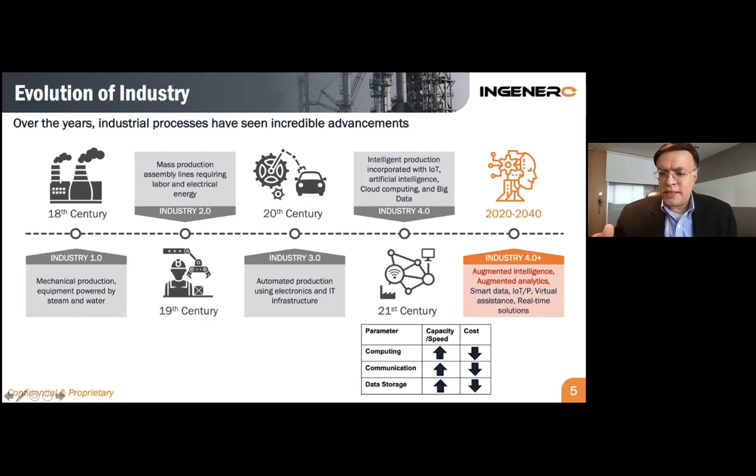And that's, again, based on our experience. So a couple of points that I will be taking up: the whole concept of augmented intelligence and augmented analytics, smart data, Internet of People, real-time solutions. That's really things that I will be covering as part of this whole presentation.

Let's start with augmented analytics. Now, analytics - we've had different kinds of analytics over the years, and what has really changed is now the ability for providing real-time solutions based on these analytics. Earlier, some of these solutions would take a lot longer - it took orders of days, months, and then it went down to hours, and now you almost have real-time solutions.

So augmented analytics - some of the key features are real-time solutions, utilization of artificial intelligence, machine learning, and domain expertise is certainly important, and I'll really get into that. The end result is getting augmented intelligence that can help improve operations or improve whatever activity is happening.

So now this type of analytics includes descriptive, diagnostic, predictive, prescriptive analytics that ultimately helps process manufacturers take well-informed decisions.

Let me talk a little bit about artificial intelligence. In the last few years, there has been a lot of hype about machine learning and deep learning models, and that has been equated to artificial intelligence. Yes, that is one of the subsets of artificial intelligence, if you will. But actually, people have been talking of artificial intelligence even way back in the 60s and 70s.

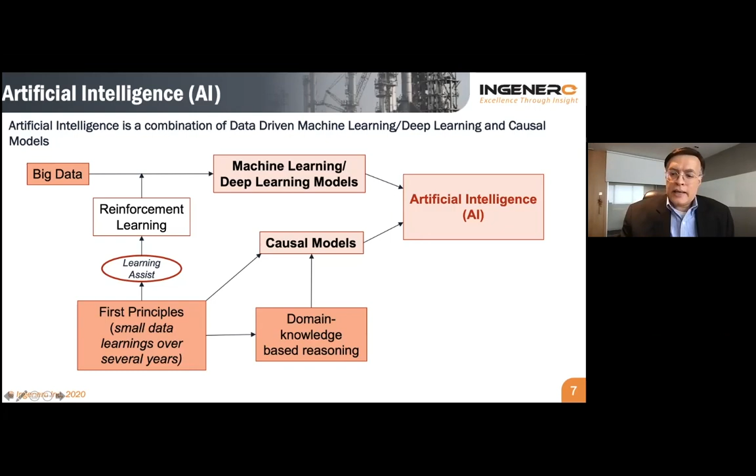So that combined with these causal models, from the first principles and domain knowledge, that combination is really what forms artificial intelligence. So it's a combination of the two. And it's important to use both of these, is what we've learned.

Next thing is augmented intelligence. I've been talking about that. So really, when we talk of artificial intelligence, it's not today where we're talking of replacing the human being. The human being continues to have tremendous value. There's been a lot of debates in the academic world about artificial intelligence completely replacing human intelligence, and they call it the point of singularity, but they say it's going to be 2050 or beyond.

So how do we use this? Today, where we can very effectively use this is using these techniques to handle large multidimensional analysis, time-consuming tasks, which would take the unaided human being forever, or may not even be possible. So some of these rote tasks can be very easily taken care of by these AI systems.

Now, once that is taken care of, it throws up a lot of insights and intelligence, which then the human being can start at a very different level, and use that for much higher productivity, much higher earnings, overall job growth, enhanced quality of the job. So that combination of human intelligence and artificial intelligence, providing the augmented intelligence to the human being, takes it to a very different level. That's the whole area of augmented intelligence, and that is really the application today of digitalization and so on, for us to take advantage of that.

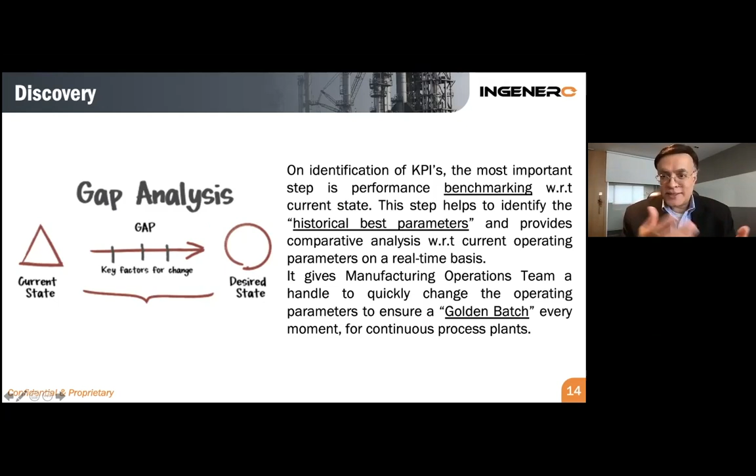And then defining your goals. You set your KPIs, set goals - this is how much I would expect to improve. Set realistic goals, and then you go into the delivery.

And delivery is where it's really combining the right tools and techniques. Having the expertise and domain experience is very, very important. And this is something we've learned through our past few years of working with digitalization - seeing some digitalization efforts at some places haven't really gone as successfully as intended.

Using fundamental principles is equally important, along with things like artificial intelligence and machine learning. This is again something we learn. Being able to very effectively hybridize and use them together is really where we start seeing very effective solutions coming out. The augmented intelligence that comes out of that allows for better decision making.

Again, like I said before, making sure that you change the work processes to be able to utilize this augmented intelligence. A different way of working. If you continue to work the way you have, you're just going to automate inefficiencies, and you don't want to do that. So you want to take advantage of these new digital solutions and take it to the next level.

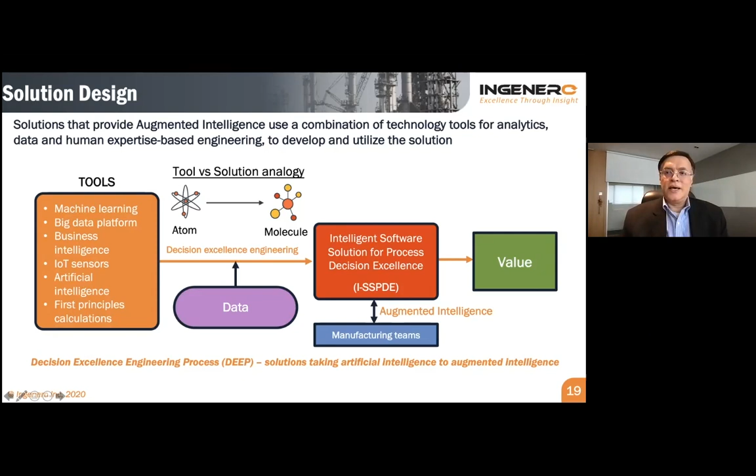And of course, once you have the solution, it provides the augmented intelligence to the manufacturing teams, and that's really where the value comes off.

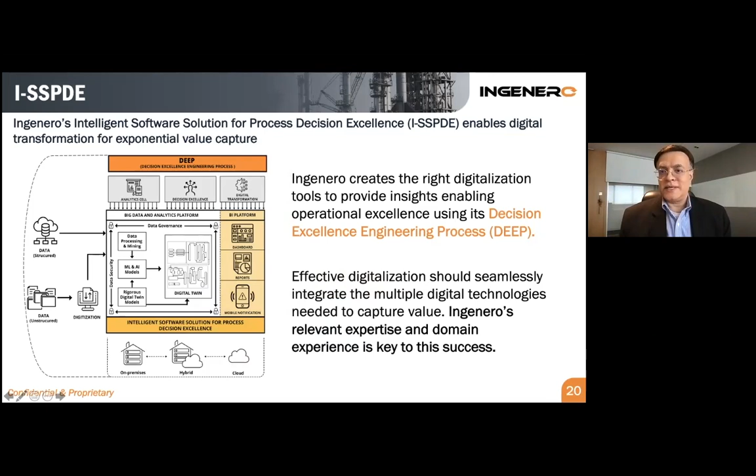Just a very quick glimpse at what we call I-SSPDE. Like I said, it's a seamless integration of various pieces of tools, ML, AI. You take the digitized data, utilize tools like ML and AI fundamentals, business intelligence where you get your dashboards. It could be deployed on the cloud or on premises, or it could be a hybrid. And then, of course, you have the decision engineering on top of it, making sure all this is pulled together and works along with the domain expertise and so on.

So some of the typical features of I-SSPDE: it provides actionable intelligence. They are hybrid models, data historian agnostic, smart dashboards, and it's an optimizer. Another very key thing is that it's false positive resistant.

This is where the combination of domain expertise with machine learning really is helpful, because pure data with a machine learning model, oftentimes you get a lot of false positive alerts and things like that, which you really don't want, because the system could then go into disuse very, very quickly.

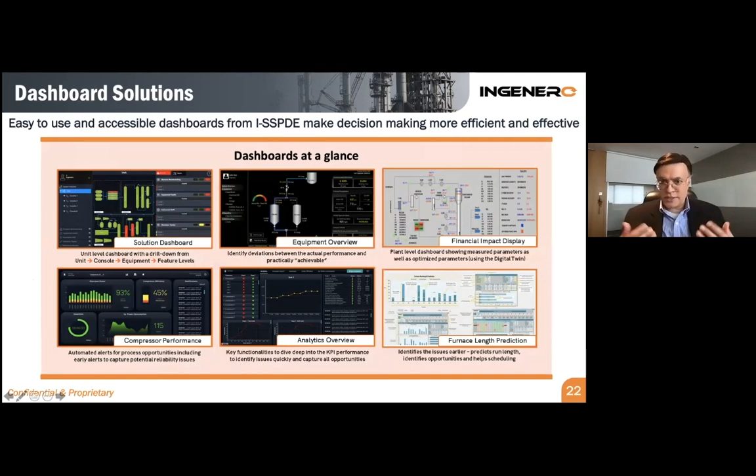Certainly, it's multidimensional, real time. There are soft sensors and so on. And so what it basically provides is accessible dashboards, making it more effective and efficient on the decision making. Various kinds of dashboards for different levels for the management, providing more financial information, equipment overviews, overview of the plant for plant management, engineer level overviews, and so on.

Quick case example. This is one of the organizations we worked with, and we started in about 2015 with them. This is one of the largest NGL pipeline networks in the US. We set up these advanced analytics and digital solutions for them across 40 sites. And then they took all this augmented intelligence and brought it to a central location, their headquarters.

They've got this single room where it's like a space station almost. You have large screens where you can pull up any facility or any combination of facilities and actually see the intelligence. And then you have the centralized team collaborating with each of these facilities, actually using this intelligence to augment the way they're operating.

And this we found had worked very effectively with this organization. They finally were selected as one of what they call the lighthouse facilities for digital solutions. They increased their profitability by 15% in the first year and reached almost 22% in the second year. So it was a very successful digital solution implementation.

And certainly there were a lot of learnings that came out of that. They did address a lot of their initial issues that they were starting out to solve, like some of the quality issues, underutilization of capacity in these assets, and so on. So that is an example of one of the places where we worked.

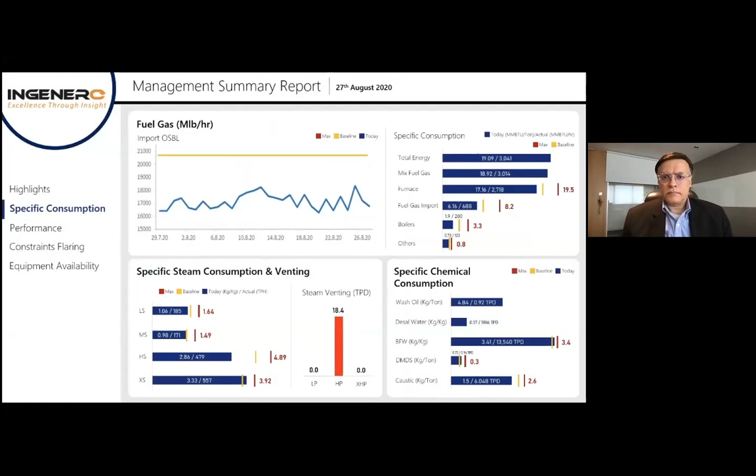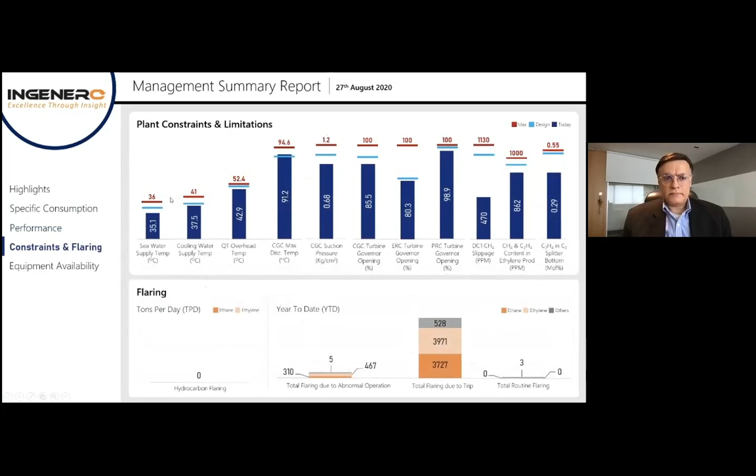In future, we could add more sections like inventory, accidents, deviations, and energy intensity according to the client requirements. Let's go to the next demo, which shows you some soft sensor applications.

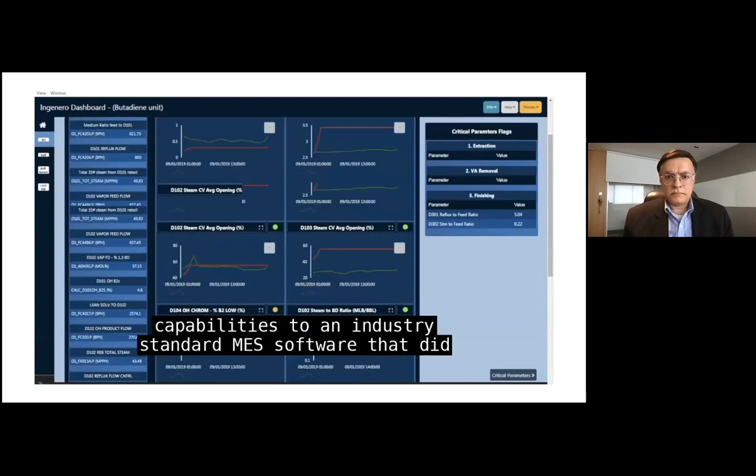Here is an example of how our product added AI/ML capabilities to an industry standard MES software that did not offer AI/ML capabilities in the MES suite.

Soft sensors were built using ML models to predict product quality in real time. Additionally, a forecast of up to 2 hours was also part of the prediction. This helped a customer take corrective actions ahead of time to avoid product off-spec issues and quality giveaway issues. Even a handful of such instances per year has the potential of saving millions of dollars.

Additionally, customized business intelligence dashboards delivered real-time updates for this customer. It is a one-stop place for a quick performance overview of the plant, identifying key areas which need attention, live recommendations for corrective actions, analyzing the high-level monetary impact as well as technical details at the operation level. It also offers different levels of views, which enable users to look into the level of detail per their requirement and time available.

And now this is another demo that shows an example of a real-time analytics solution that was done at an ethylene facility. Let's take a quick look.

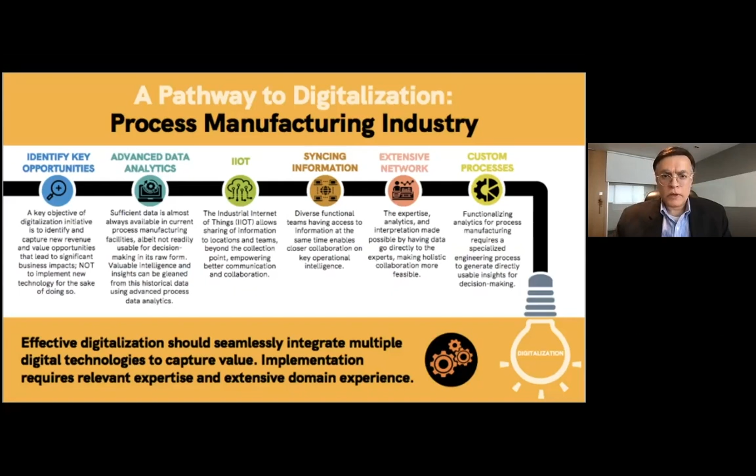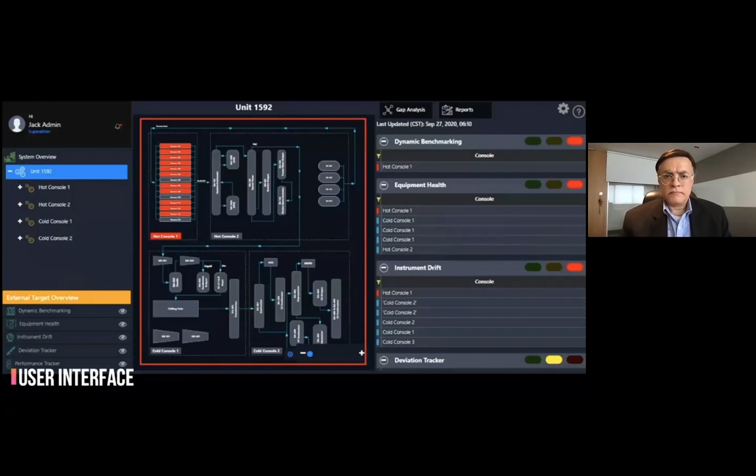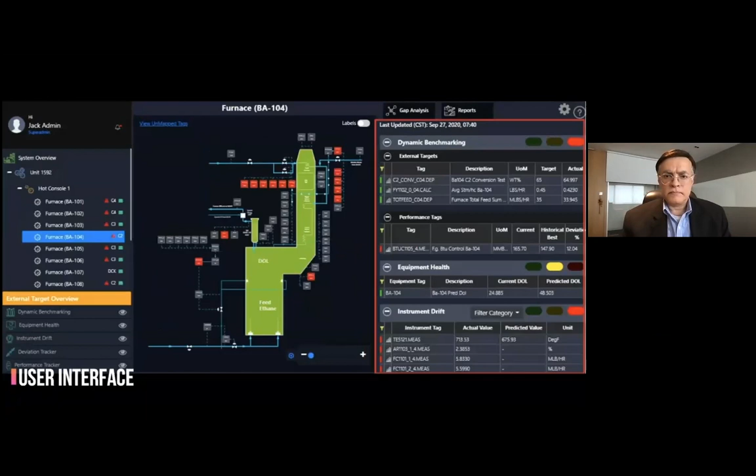Color of elements in the graphics will change based on the type of alert for that element. The right section provides the details of 5 features for the selected unit, console, or equipment. These 5 features are dynamic benchmarking, equipment health, instrument drift, deviation tracker, and plant performance tracker.

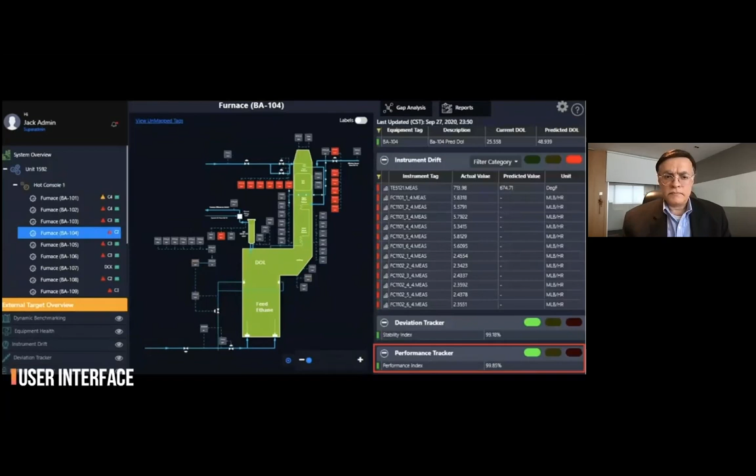Dynamic benchmarking: the objective of this feature is to identify historical best operation for a given equipment, while ensuring that the historical best from the last 3 years of operations closely matches the current operation of the equipment, but had better performance historically compared to its current operation.

Graphs help the user understand when the performance of a transmitter was in alert stage, shown with red indication, and when it recovered, shown with green indication.

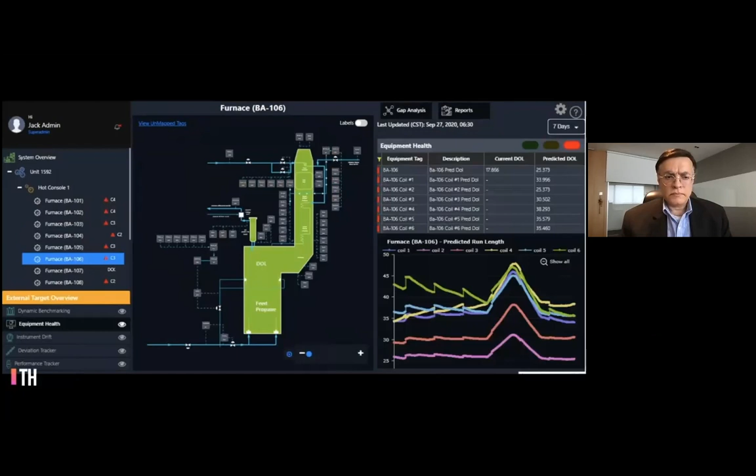Furnace run length prediction: the software helps understand the number of days a particular furnace can run, considering the threshold of the maximum allowable coil inlet pressure. The software is self-iterative, and coefficients for predictions are evaluated and refreshed every 10 minutes.

Here is a demonstration of value capture from live data for the dynamic benchmarking feature, which has the potential to save $0.7 million for one furnace run operation.

In the future, this can be developed for other individual units, which can be further extended to the entire complex level, to provide overall complex status and execute improvement potential through the software solution. Thank you for watching this video.

Let's roll on to the next one, which is an example of a reliability application.

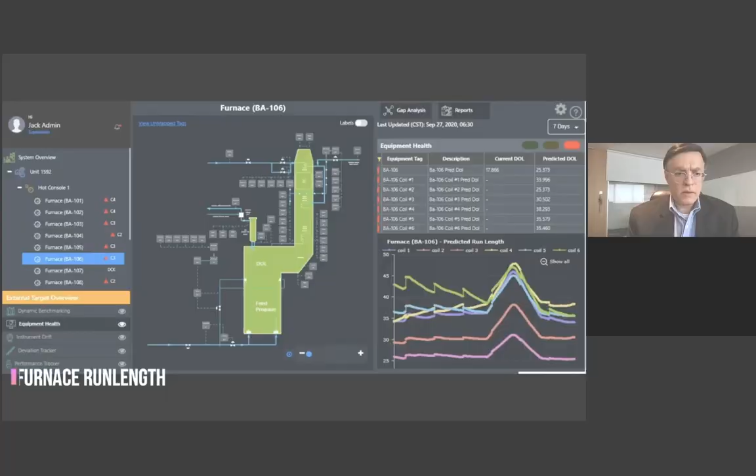Hello everyone, welcome to Ingenero's machine learning-based reliability tool that covers 16 critical equipment of an ethylene facility. The reliability algorithm can run in real time as well as for past dates chosen by the user.

Equipment that have performance issues are flagged in red, for example the quench tower in this case. Each equipment has detailed drill-down views.

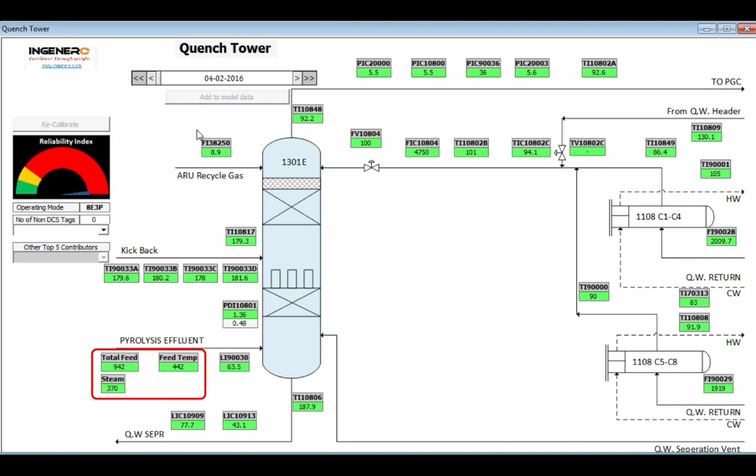For the chosen date, several critical correlated operating variables like quench tower feed, steam, and feed temperature are tested for abnormal operation. Critical variables are flagged in red, and other top contributors to abnormal operation are also flagged in real time. In this case, the total steam to the quench tower has been reduced.

Even though the absolute value of steam is normal, its relative value to the hydrocarbon flow is not normal. The relationship between propane feed to ethane feed and its ratio with steam is not normal operation.

The combination of low steam to hydrocarbon ratio and high propane to ethane ratio has led to severe fouling in the past historical data. The ML algorithm has accurately classified the current operation as a bad operation and has pointed out the root cause for the abnormality.

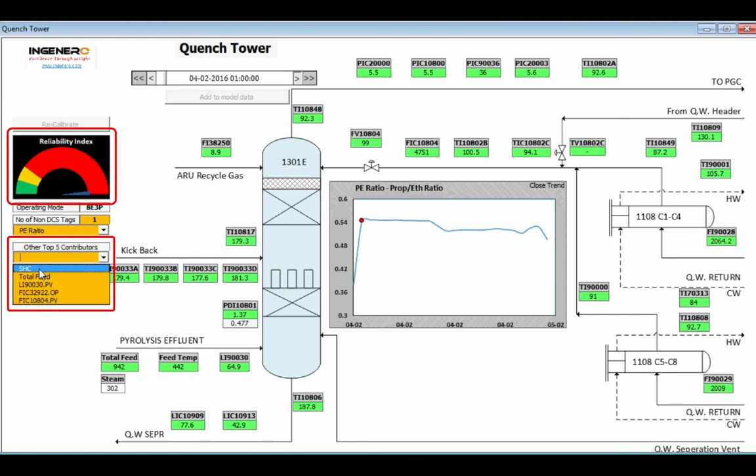Thank you for watching this video.

We go to one final one, and this is actually a refinery example, and then we'll wrap up from there.

Hello everyone, welcome to Ingenero Data Modeling Solution Tutorials, or in short IDMS tutorials. This is an introductory video to briefly explain the furnace module, which covers the clean TMT and run length feature. TMT stands for tube metal temperature, or skin temperature. So let's get started.

Once you are signed into IDMS system, you will see the IDMS system view. In this view, you can see different page options menu on the left-hand side pane.

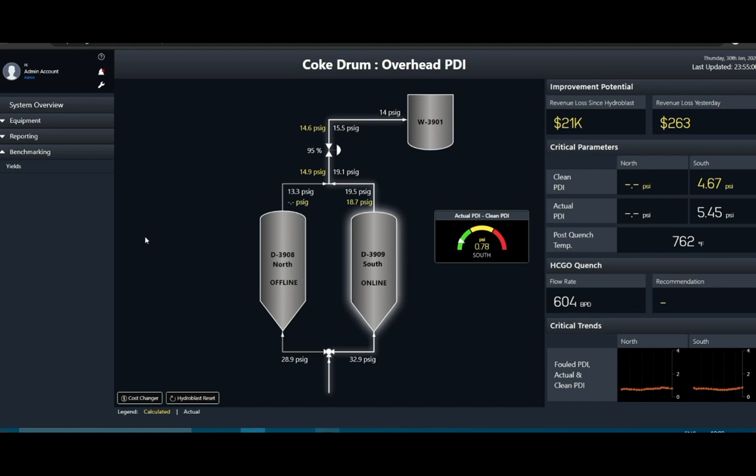In Billings Coker unit, there are two furnaces. Furnace A has pass 3 and pass 4, and Furnace B has pass 1 and pass 2. To access the furnace module page, follow the Equipment section, then go to Furnace and click on the respective furnace page.

Both furnaces have a similar user interface. Once clicked, the Furnace module user interface will appear. It is classified into two major areas: the central graphics and the right pane. The central graphics area contains a graphical representation of the coker furnace. The furnace graphic image contains colored circles corresponding to skin temperature indicators for each pass.

A Labels button is provided in the top right-hand side of the central graphics, used to toggle between two furnace screen views: Lean View and Detailed View. When the Labels button is off, Lean View appears. The circles are clickable, and on click it will show the details of the associated tag ID and values.

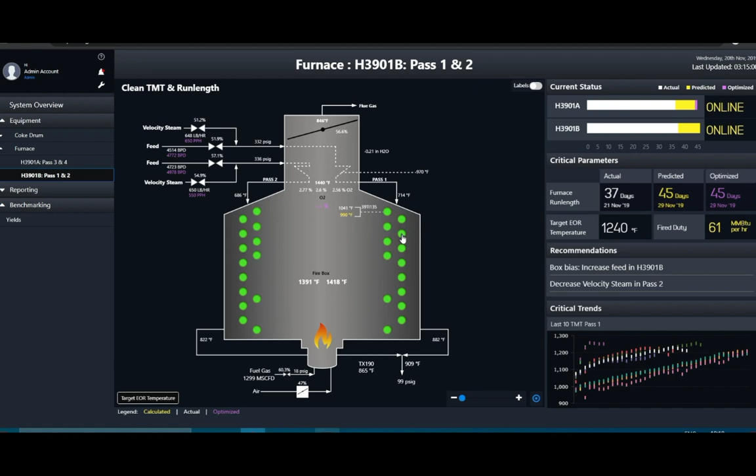When the Labels button is on, Detailed View appears. Circles are not clickable; tag ID and associated values will appear directly on the screen. The furnace module is divided into two categories: clean skin temperature and run length.

Let's first discuss the clean skin temperature module. This module has been developed to predict clean skin temperature of all passes in real time. For any circle, yellow color numbers represent predicted skin temperatures, and white color numbers represent actual skin temperatures for that tube location. Circle colors are assigned based on the extent of fouling.

Green, yellow, and red colors represent less, moderate, and high fouling respectively. A pop-up graph will appear after clicking on any tube skin temperature tag ID or value, in which actual and clean skin temperatures are compared. On this graph, the x-axis and y-axis represent time and temperature respectively.

Y-axis can be auto-scaled using the y-axis auto-scale option, provided on the bottom left-hand side of the graph. A Smoothened toggle button is provided on the top right-hand side of the plot to see 5 minutes data trend instead of daily average data. Trend duration can be changed from the available drop-down on the right upper corner of the trend.

Let us discuss the furnace run length module. It is developed to predict furnace run length and suggest changes in process variables to achieve optimized run length. The bar graph on top right-hand corner of the right pane gives comparison of actual, predicted, and optimized run length for both furnaces along with furnace current status.

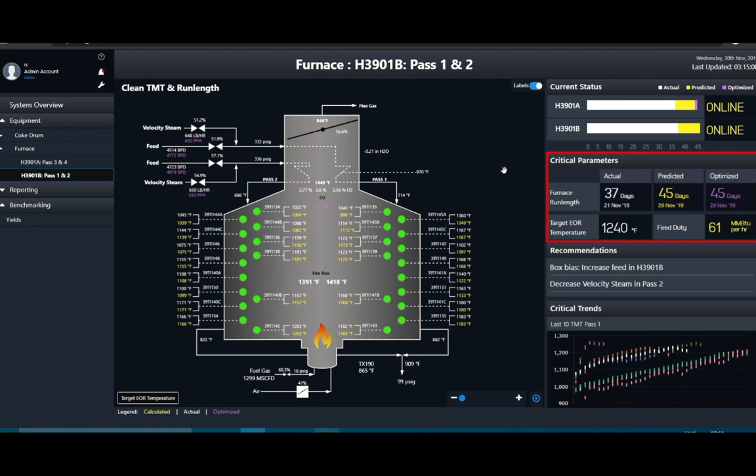The Critical Parameters table on the right pane displays the actual, predicted, and optimized run length along with expected EOR date. Actual furnace run length represents the actual number of days the furnace has been online. A pop-up trend appears on clicking predicted run length.

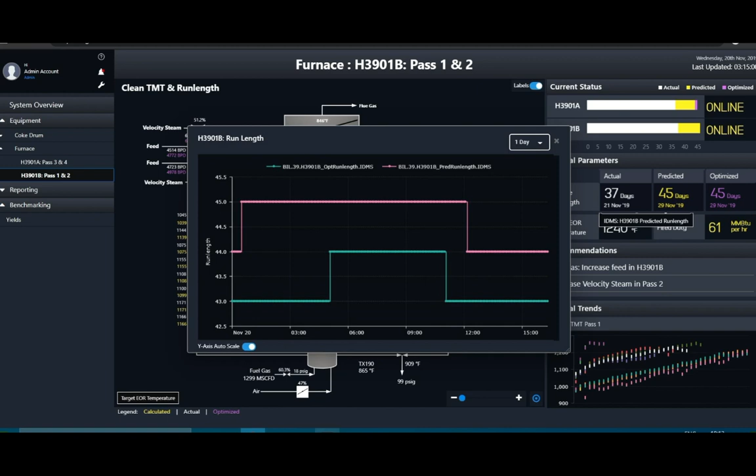Predicted run length can be trended with furnace operating parameters, which are available in the drop-down at the right corner of the graph. A pop-up trend appears on clicking optimized run length, in which predicted and optimized run length are compared. Furnace fired duty is also trendable on click.

The Recommendations section below the critical parameter table will display recommendations to achieve the optimized run length. Optimized run length is the maximum run length that would be feasible by changing process variables. The recommended process variable to achieve the optimized run length is shown in pink color, alongside the actual tag value in the central graphic.

Predicted and optimized run length are calculated based on the end of run temperature input by the user. To change the end of run temperature, click on Target EOR Temperature in the bottom left corner of the central graph. Please note that this option is available only for admin user level.

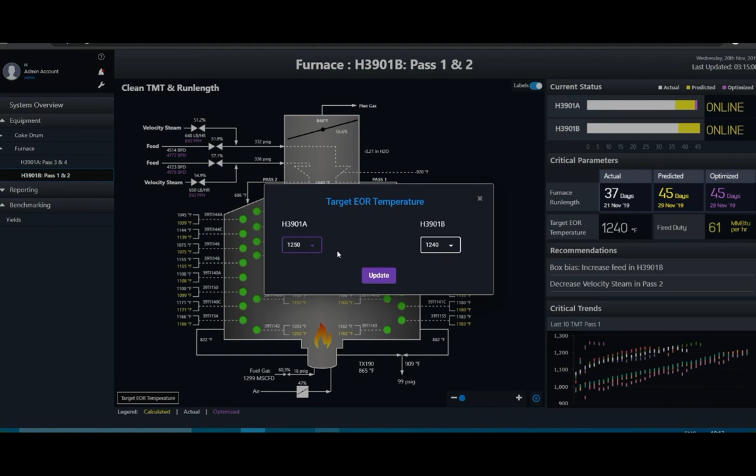On click, a pop-up window will appear to set the target EOR temperature for individual furnaces. To update, select the temperature value from the drop-down for the respective furnace and click on Update. Once the target EOR temperature is saved, predicted and optimized run length will get updated.

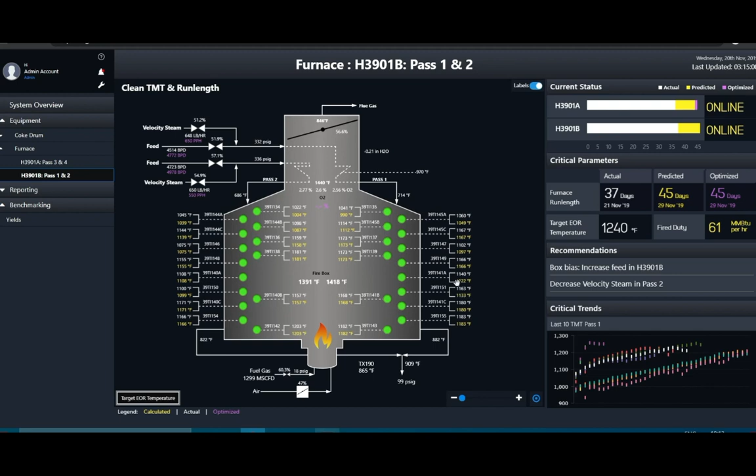Additionally, in the central graphic image, all the white and pink numbers are trendable, and the tag ID with description appears as you hover on any value.